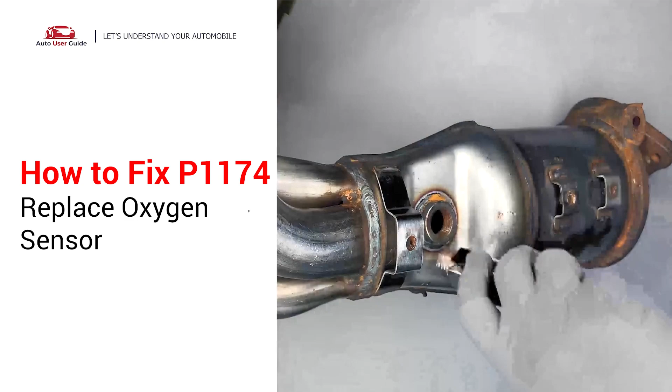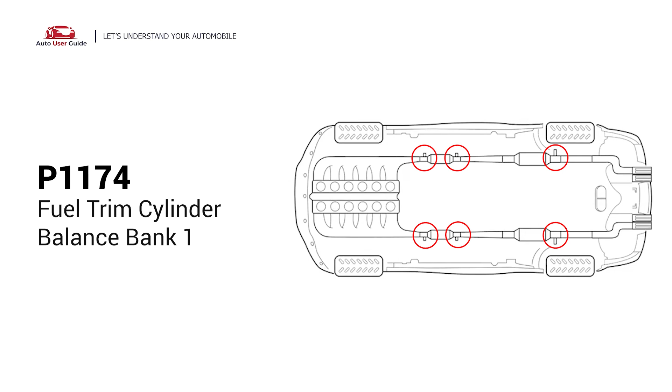By replacing the damaged oxygen sensor, you can easily fix the P1174 error code by yourself. This means that the air-fuel mixture in the engine's cylinders is incorrect, and the PCM has reached its fuel trim limit for Bank 1. Under this circumstance, short-distance driving is permitted, but your vehicle should be repaired as soon as possible.

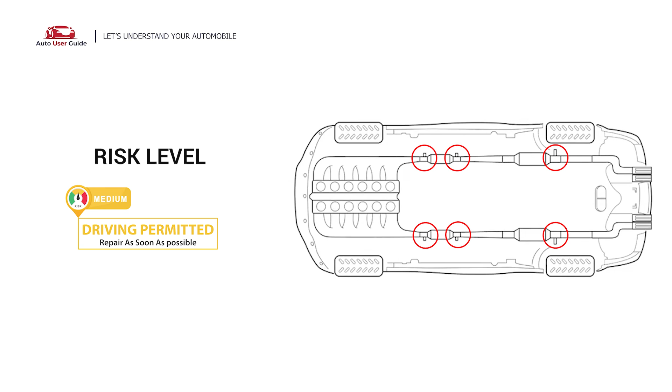Oxygen sensors, also known as O2 sensors, help determine whether the air-fuel ratio of combustion engines is rich or lean in real time.

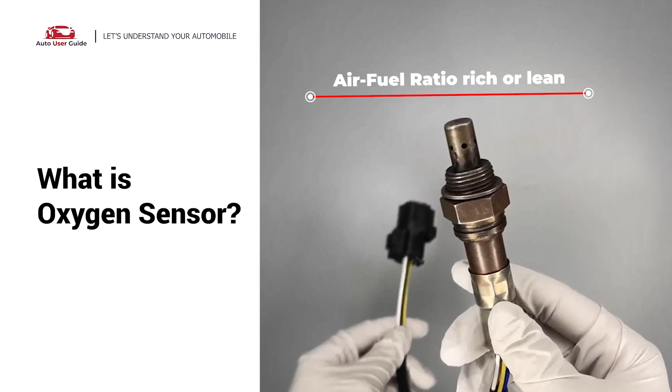Oxygen sensors are located before and after the catalytic converter, and here are the sensor's locations.

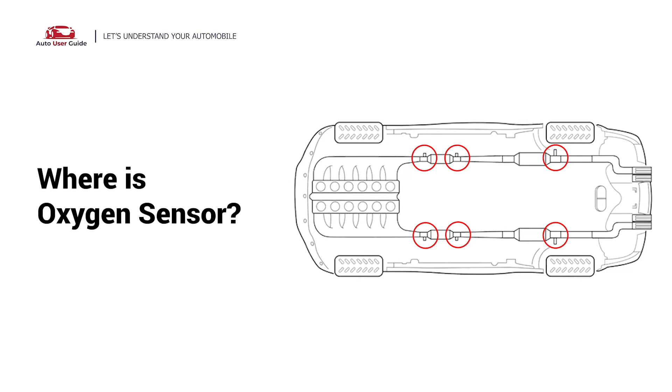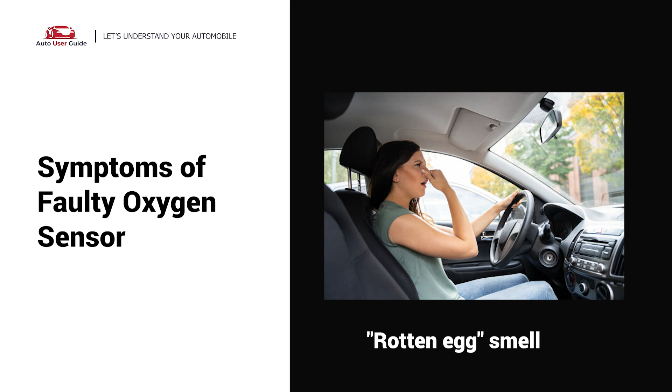A faulty oxygen sensor may cause black smoke to come out from the exhaust. You can notice fuel efficiency loss and a sulfur-like or rotten egg smell.

Here are two methods to fix the oxygen sensor. First, modify the oxygen sensor. You can remove the oxygen sensor from the converter.

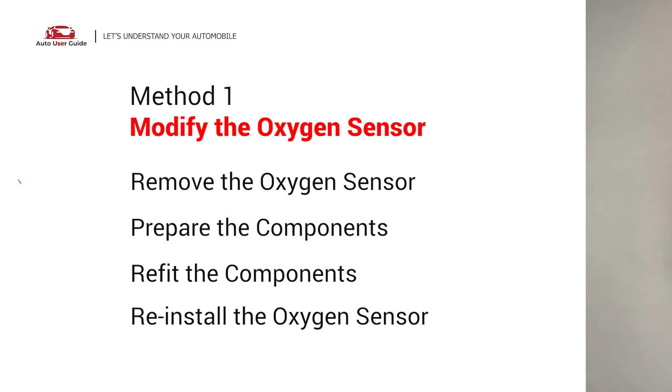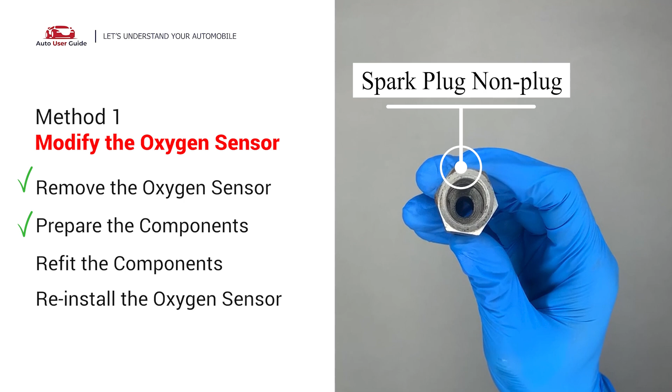For the P1174 code, put extra space between the sensor and the converter. Get the spark plug non-fouler, which now has enough space to fit into the oxygen sensor, then use a 1/2-inch drill to refit it. By doing this, put them together and put it back on the catalytic converter.

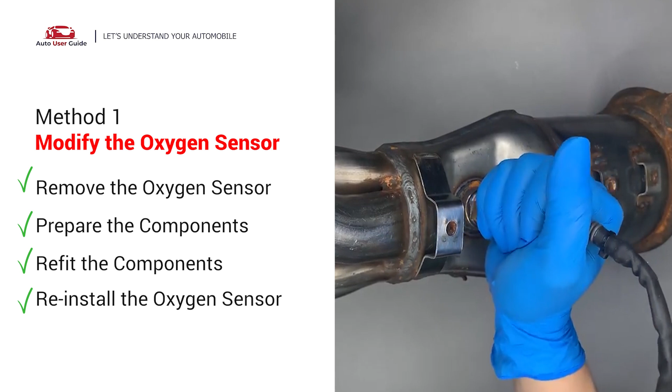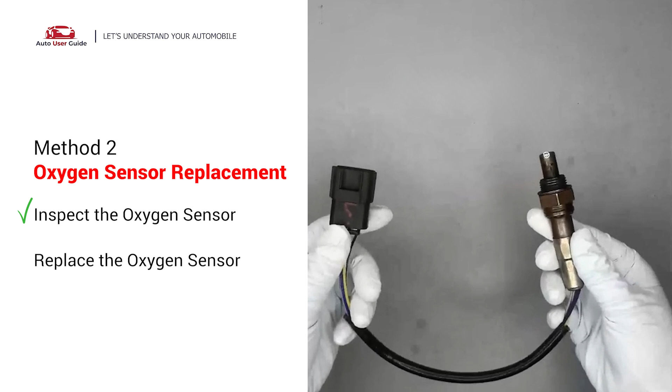Second, oxygen sensor replacement. Carefully remove the oxygen sensor from the catalytic converter and visually check the oxygen sensor electrical connections, wire harness, and metal tabs for any damages. If damages are found, then replace the oxygen sensor.